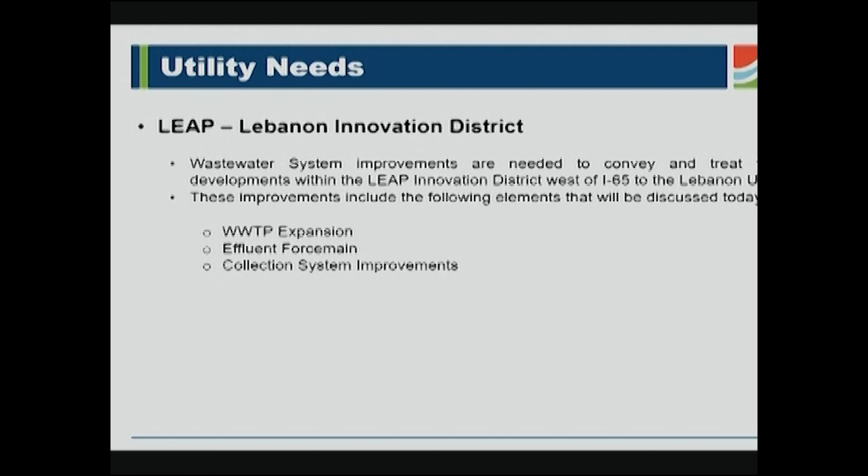First, the wastewater treatment plant expansion. In consideration of the expansion, we looked at a number of different alternatives. We looked at a no-action alternative or optimization of current facilities, at which point in time there really isn't an option. We have more flow and we do not have the capacity to treat it. Second alternative we looked at was regionalization. And like the first alternative, there is not an option or an available regional facility to transport flow to.

And the third option was a phased expansion to accommodate LEAP growth at the wastewater treatment plant, so that we build the wastewater treatment plant in increments that allows it to provide treatment for LEAP as LEAP occurs. So the ultimate plant will be built for 20 MGD and a peak of 48.3 MGD at full build out.

What we're here to talk about today is phase one of this expansion. So we have come up with three phases. We go from 5 to 10 in phase one, 10 to 15 in phase two, and 15 to 20 in phase three. And that's average flow.

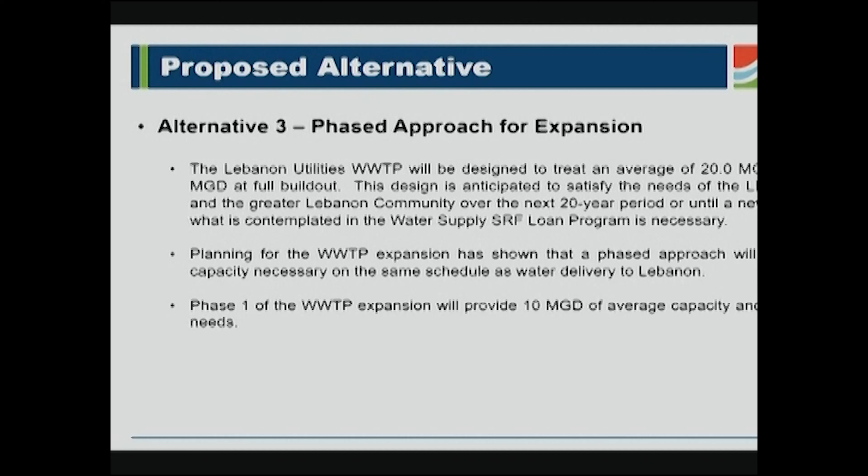What that looks like is that as we move across from where we are from an existing capacity perspective at 5 and 15 MGD, phase one is 10 MGD with a peak of 24.5. It would allow the utility to treat approximately 15,000 pounds per day of BOD, TSS, 420 pounds a day of phosphorus, and about 1,800 pounds a day of ammonia. As LEAP continues to grow, phase 2 and phase 3 then become relevant.

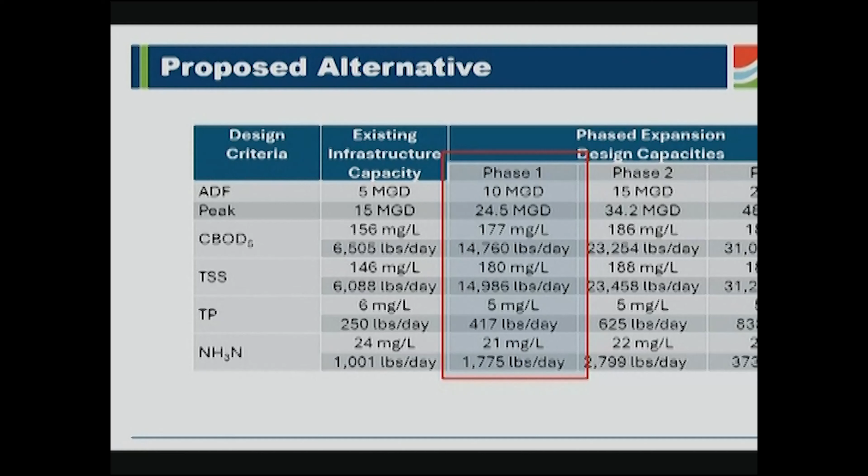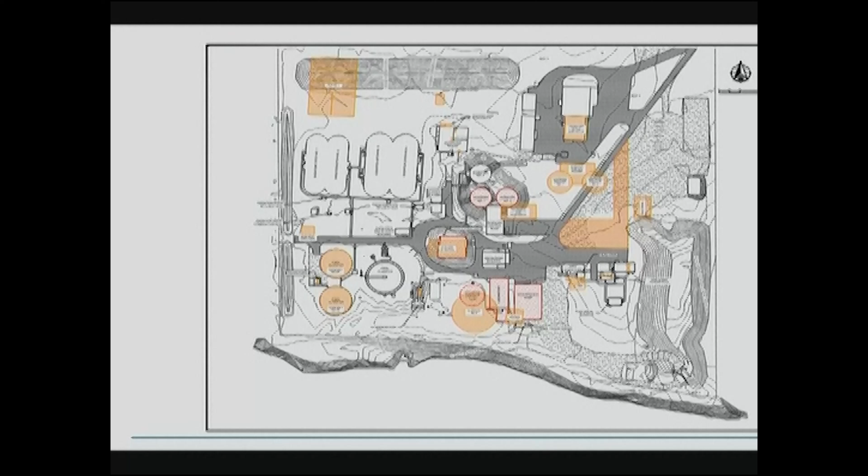The initial phasing for the wastewater treatment plant consists of an alteration of the site plan that's represented here in orange versus what's in gray as far as existing. You can see that we're adding additional pumping capacity, adding additional grit, additional aeration, clarification. One of the things that we do have to do to accommodate this growth is demolish a number of facilities to accommodate the increased treatment needs.

The schedule that we're operating under right now is we have submitted the PER to the IFA, to the SRF program. So today we're completing the public hearing requirements. Anticipated PER approval is in February 2025, at which point in time we'll come back to the board for formal approval of the PER. Relevant dates for this is that the project has to be substantially complete by January 2027 to fulfill the current promises that have been made by the utility.

Transitioning now to the effluent force main.

As part of the water agreement with citizens, there has been a request to balance water discharged from Lebanon back into the Sugar Creek watershed with a portion going back to the Upper White River watershed. To maintain this balance, we've come up with an effluent force main that will return water back into Eagle Creek, which is part of the Upper White River watershed.

The force main will ultimately convey an average daily flow of 15 MGD, and it can convey a peak flow of up to 25 MGD.

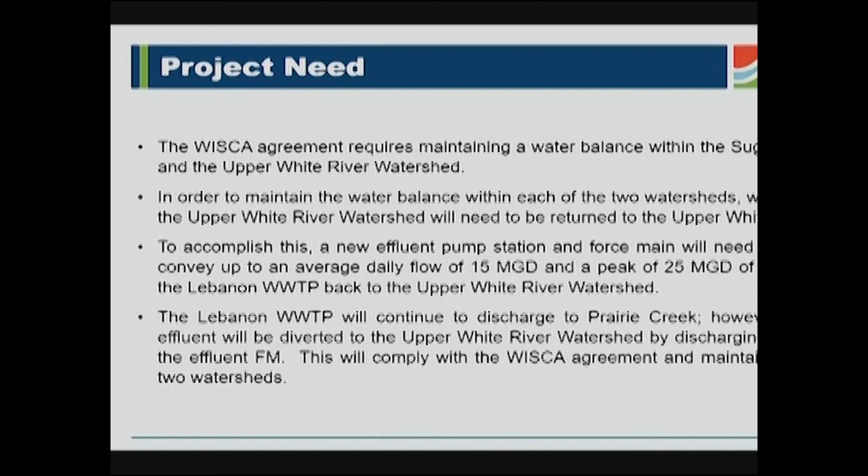Not all of the water, however, will go through the effluent force main. A portion of the water discharged from Lebanon Utilities will also go to Sugar Creek or Prairie Creek, as it does now, which is part of the Sugar Creek watershed. So effectively, this project is to create balance between the watersheds.

When we were evaluating alternatives for this project, we looked at 7 different potential discharge locations and routes, with respect to both hydraulic capacity as well as water quality.

Selection of the most suitable outfalls was based on watershed area, a Q710 - which is a 7-day, 10-year low flow - the harmonic mean of the stream, as well as 10 and 100-year peak flow data. So effectively, we're looking at the hydraulics of the stream.

After evaluation, there were 7 potential locations determined that were part of the Upper White River watershed, but only 2 were really considered feasible from the hydraulic and water quality perspective. This quickly narrowed down to 1, because one of the locations also has downstream water quality issues. So the recommended alternative was to convey flow south from Lebanon to immediately upstream of the Eagle Creek Reservoir.

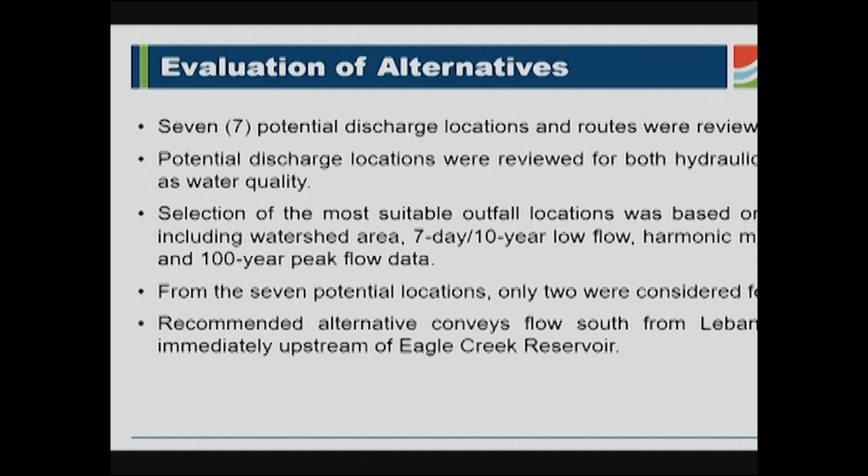Potential routing is indicated here, and again, this is at the planning level. It's a route that generally follows Indianapolis Road and Lafayette Road from Lebanon down to Eagle Creek. It's approximately a 16-mile route.

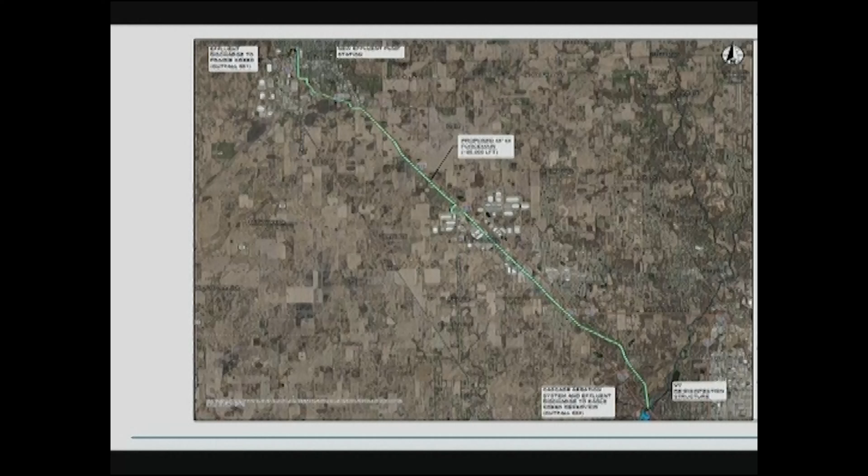Schedule for the effluent force main: submission of the PER is in January of 2025. The public hearing is tonight. Anticipated PER approval is in February of 2025, at which point we would come back in front of the board for formal approval. This project needs to be substantially complete and operational by January of 2029.

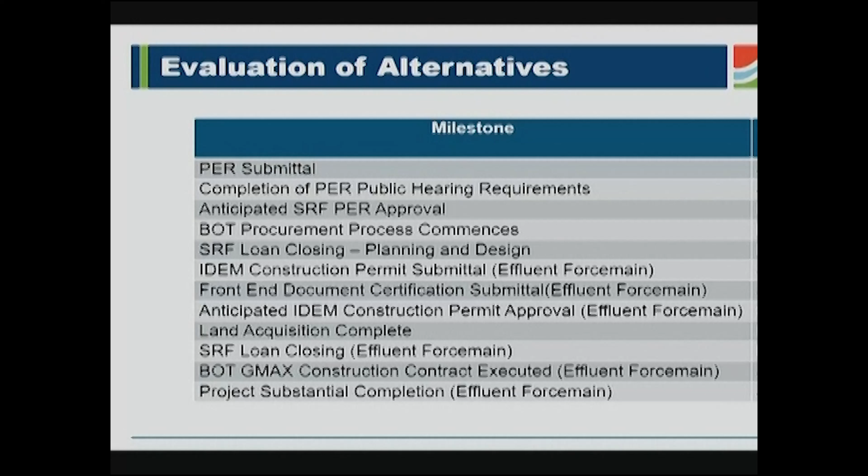With that, I'm going to turn it over to John Leitner to talk about the collection system improvements. John Leitner with Butler, Fairman, and Seifert. I'm going to talk about the collection system improvements portion of the project that was included in the PER.

As we looked at the utility needs of serving and conveying flow from the LEAP district to the wastewater treatment plant as it's expanded, we identified a number of alternatives that we evaluated. There was a no-action alternative, which won't work, as we already have development projects in the works in LEAP that need to convey flow to the wastewater treatment plant.

We looked at, as alternative one, a large diameter gravity interceptor sewer coming straight from the existing south interceptor sewer just upstream of the wastewater treatment plant. We ran into conflicts on the west side of the interstate, where the sanitary ditch crosses under the Big Four Trail in a culvert, which did not allow us to get as far as we wanted by gravity.

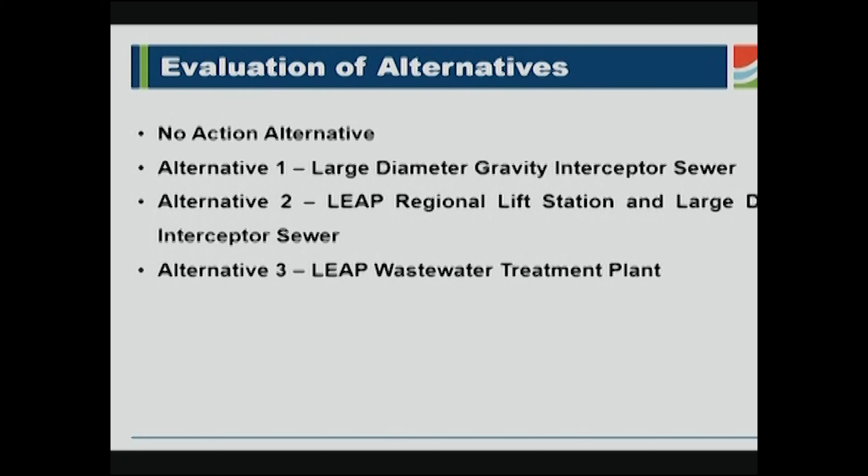While that could be a viable alternative, it's far more expensive to construct a brand new plant than it is to construct collection system improvements to take it back to our existing plant.

So our proposed alternative that we're recommending is alternative two: the LEAP regional lift station and large diameter gravity interceptor sewer. The LEAP regional lift station is going to be designed to pump an average of 9.4 MGD.

We're still working on peaking factors and trying to confirm exactly what our peak flow will be at full build-out to match up with the wastewater treatment plant expansion. But this design is anticipated to satisfy the needs of the LEAP Innovation District over the next 20-year period, or basically until a new water source beyond what is contemplated in the Water Supply SRF loan program is necessary.

The LEAP regional lift station will be set at a depth of around 25 to 30 feet to allow for nearly 12,500 feet of large diameter gravity interceptor sewer to be constructed along the Big Four Trail to County Road 350 West.

Connections from end users to the LEAP collection system improvements contemplated with this project will be made by others. It's anticipated that branch sewers and force mains from lift stations will convey the flow from the LEAP Innovation District to the large diameter gravity interceptor sewer, leading to the LEAP regional lift station and ultimately pumping to the plant.

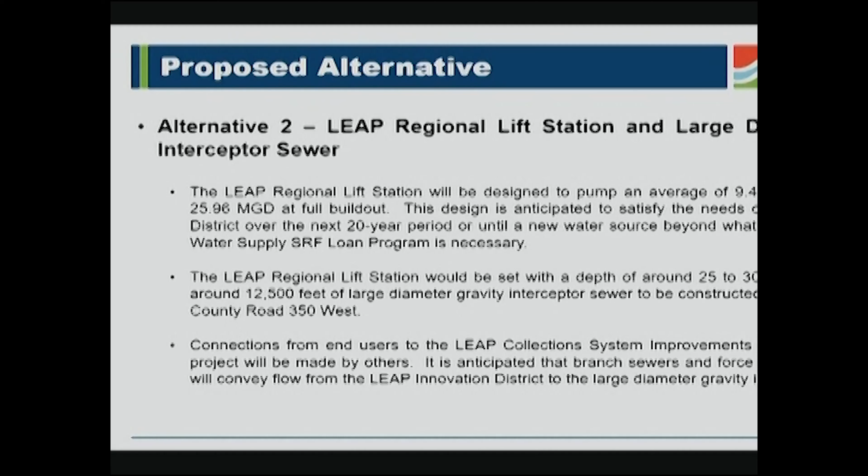Here's a depiction of those improvements showing the LEAP regional lift station, a large diameter gravity interceptor sewer, and likely dual force mains leading to the existing wastewater system.

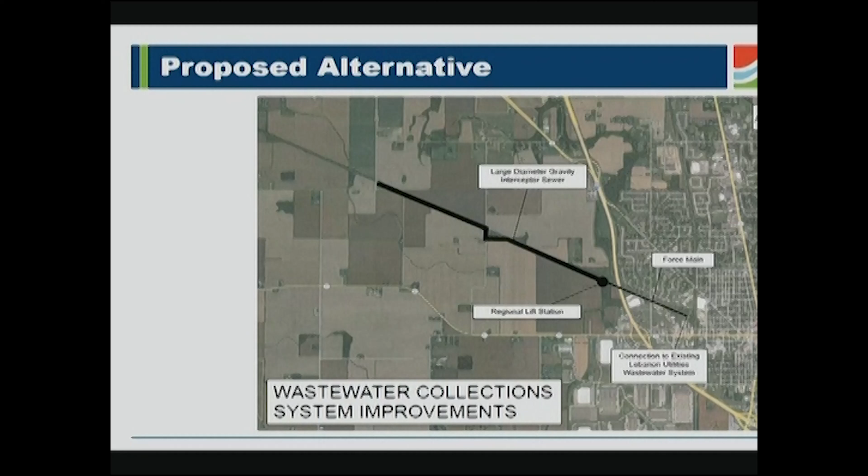Had a good question from one of the board members during the open house about why we don't have a straight line along the Big Four Trail, which is an excellent question. The reasoning is that during the preliminary engineering report and environmental conflict evaluations, we noticed a wetland and a wooded area just south of the Big Four Trail. That kink in our alignment is avoiding any potential environmental issues.

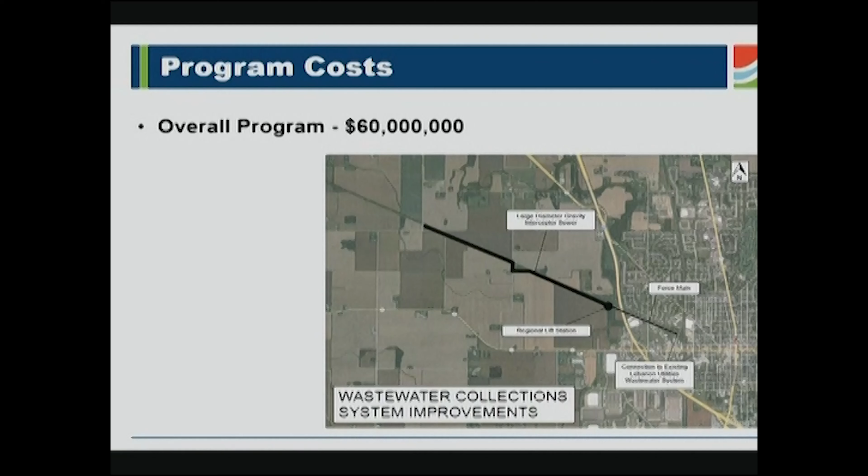So the overall program costs were in the $60 million range. Program schedule is very similar timeline to the wastewater treatment plant expansion timeline, with completion of the PER public hearing requirements happening today. Progressing on our procurement process starting in February, with substantial completion and initiation of operation targeted for January 1st, 2027.

So with that, I can pass it back to Bob for any questions you may have, or the public comment period. All right, thank you, John. Thank you, Bob. We will move to the public comment portion of the meeting now, if the board has no other questions for John or Bob.

Is this board approving the PER today after this meeting? No, the board is not being asked to approve the PER. That would come sometime in February. As has been common practice, the board would have the PER and a resolution with that, and if the board chooses to approve it, there'd be an approving resolution with the PER.

So is this going to the SRF before it comes to us again? In fact, it will be submitted, I believe, is the process. We will begin answering questions and assembling a packet for that, and once that resolution is tendered, it then goes into the official filing with IFA or SRF.